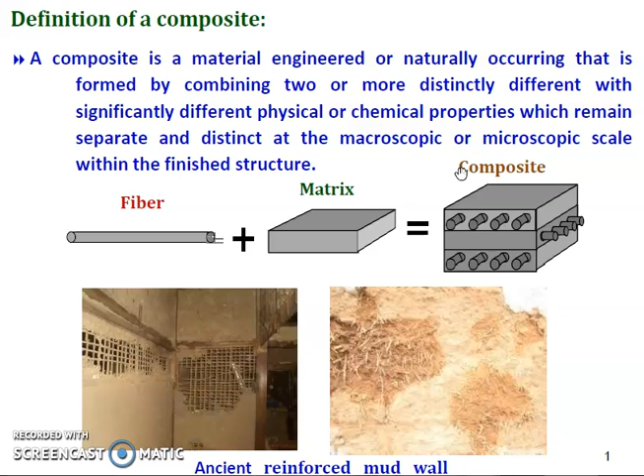For the past 70 years, the technology of design, manufacturing, and utilization of composites has increased. From 1930 to 1990, there was huge improvement in composite materials. Initially, they started with phenolics, then used epoxies and fiberglass boats.

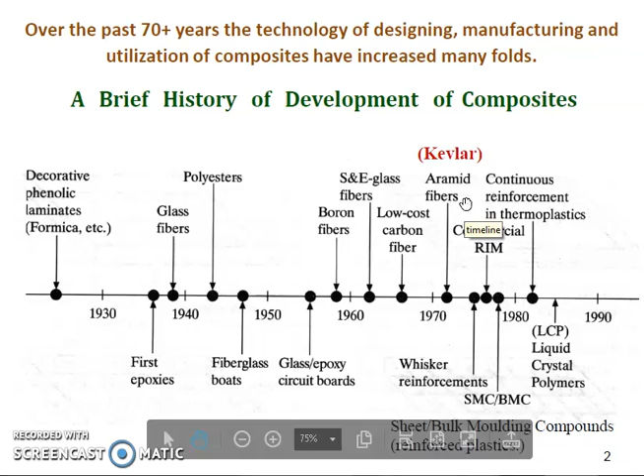Fiberglass boats started in 1945 for manufacturing purposes. Then glass and epoxy circuit boards were used. Nowadays Kevlar is used, mainly for defense applications such as armor jackets.

These are general applications showing why we go for composite materials. First, we use composite materials because of lightweight - we need to reduce the weight of the material. In automobiles, reducing weight increases the efficiency of the automobile, which is achieved by manufacturing some parts with composite material.

For example, in automobile cars, they manufacture window shields with thermoplastic composite materials. They also use superplastics and metal matrix composites. There are two distinctive phases: metal matrix composites and fiber based composites. The metal matrix composite consists of metal as the major element added with some reinforcements.

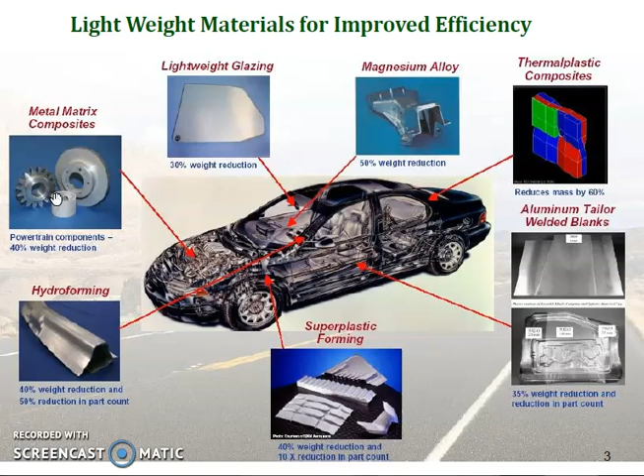Classification of composite materials: composites are classified into three parts - particle reinforced, fiber reinforced, and structural. This reinforced type we call fiber material; reinforcements we call fiber.

In composite material, the matrix always contains a large portion while reinforcement contains a small portion. For example, if you take 100% of composite material, 60% will be matrix and 40% will be reinforcement agent.

Particle reinforced composites are classified into two types: large particle and dispersion. Fiber is classified into two types, called continuous and discontinuous fiber. Then structure we call laminates and sandwich.

The laminates have layer by layer structure, which we call plywoods. Plywoods are called laminates. For continuous and discontinuous fiber, discontinuous will have two forms: one aligned and another randomly oriented. These are the important classifications of composite materials.

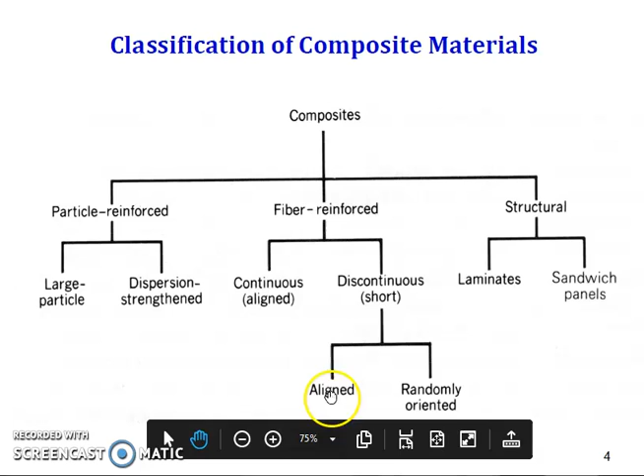Classification of polymer composites: polymer composites consist of two parts, as previously said - matrix and reinforcement. Matrix is the major part of the composite material, and reinforcement is the minor portion. In the matrix they use thermoplastics and thermosetting plastic.

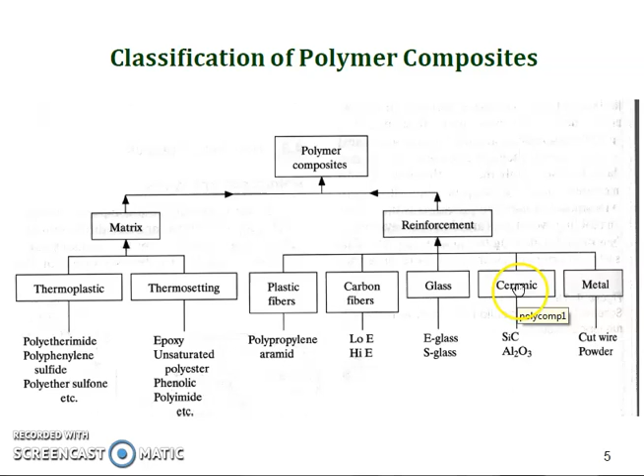Examples of thermoset plastics include epoxy, polyester and polyimide. Reinforcements are classified into plastic fiber, carbon fiber, glass fiber, and nowadays even ceramics and metal powder, in the form of cut wire powder.

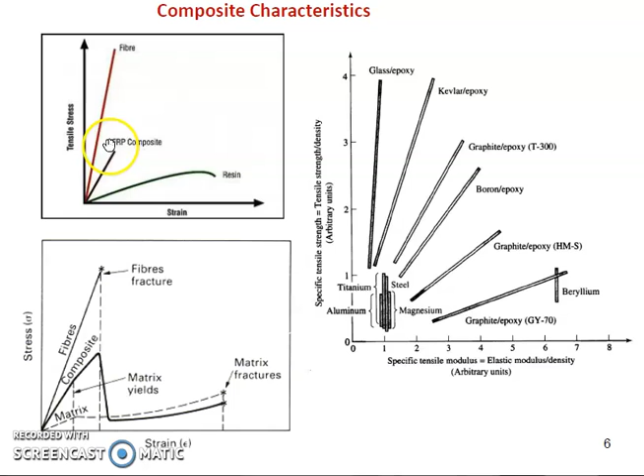These are the general characterization curves for composite material, as we have seen with tensile strength - stress versus strain. Strain is on the x-axis, stress is on the y-axis, from the tensile test. The fiber has a large portion of tensile strength and the resin has a small portion. Together we get an optimum composition of tensile strength, called fiber reinforced composites.

For example, mass reduction - this is mainly why we go for composite material, for weight reduction. You have to replace aluminum alloy or steel with a composite material. For example, carbon fiber composite material can replace steel, aluminum, or cast iron.

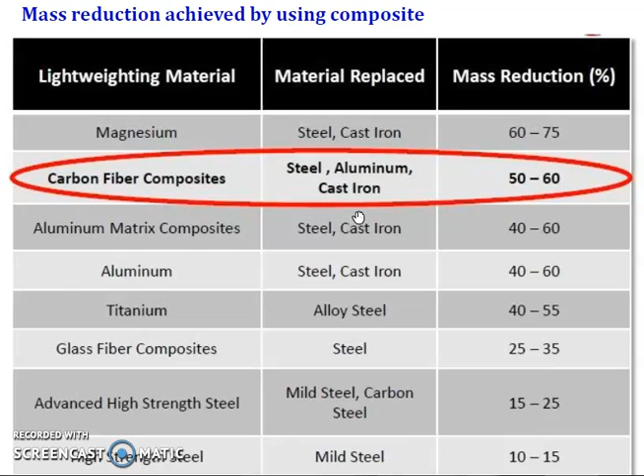There is a huge reduction of mass, 50 to 60%. If mass is reduced in automobiles or other structural applications, efficiency will be improved. Based on the orientation of fiber, there are three types: aligned fiber and random fiber - these are the different fibers which can be classified.

The properties of composite materials are unique to particular composites because they are called anisotropic materials. In anisotropic material, the properties differ in mutually perpendicular directions. In alloys, we call it isotropic material.

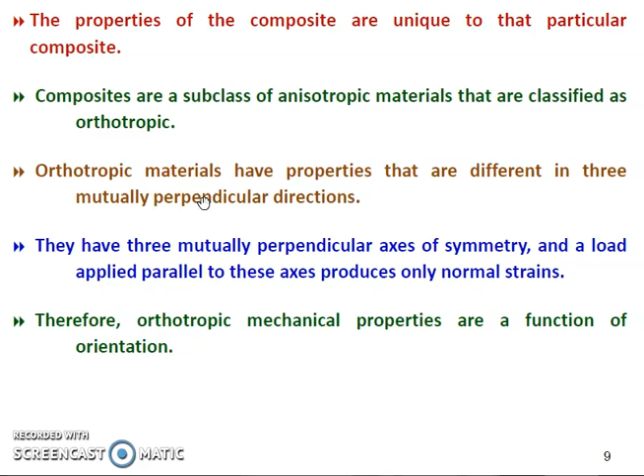The property of the material can vary from phase to phase, but in orthotropic material, if you take the X direction, the strength will vary, and in the Y direction, other strength will vary. In isotropic material, you can take a single direction as composite and get a single tensile strength. As discussed previously, this relates to continuous, discontinuous, and random fiber orientations.